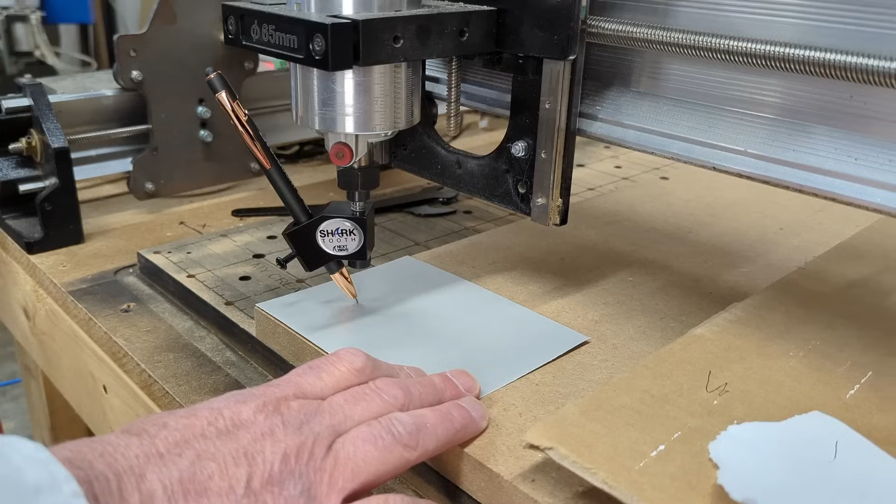In this video, I want to show you something really interesting on CNC routers. It's writing with a CNC router, like writing like that.

Now we have Liberty over here. Say hi, Liberty. Liberty's our shipping girl. She's the one that sends you your packages and writes really cool stuff on your packages and sends you M&Ms. But what she's doing right now is writing on a card.

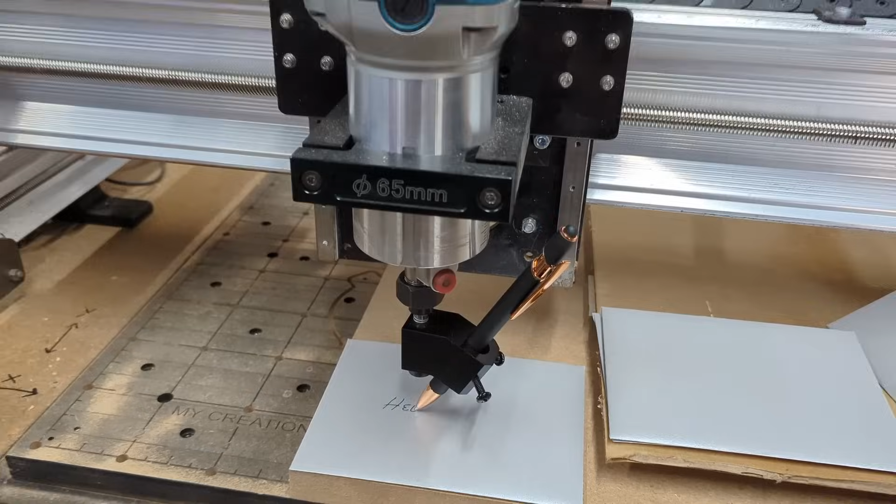So bring it in and see what we're doing here. We're writing on these cards from IDC Woodcraft, Hello CNC. If you notice here, we have a whole stack of them. IDC Woodcraft has product on Amazon, and we always want to put a personal touch on the packages. She's like, you got to write something on these cards, Garrett, that we send to Amazon when people purchase from Amazon.

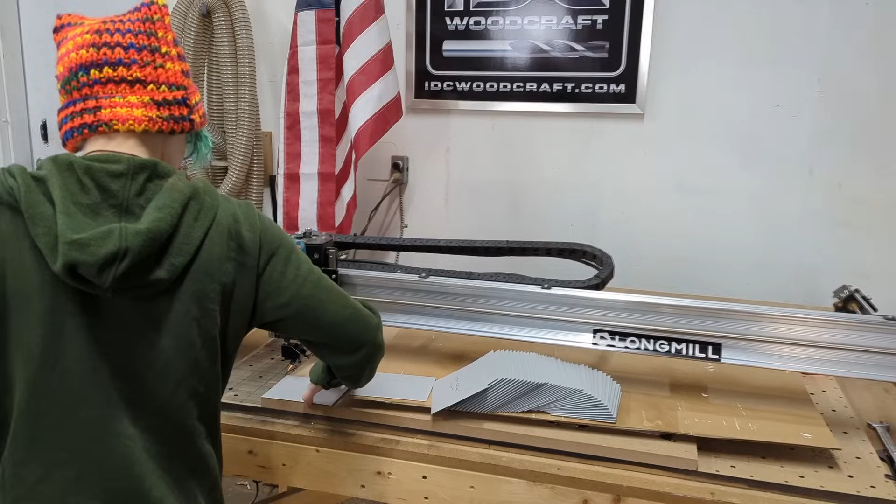So we ended up getting this pen writing jig from Shark CNC, Shark Next Wave, that writes on these cards. What she does is she just places the card on the machine after I've programmed it, and voila. And this is your handwriting, right? This is my handwriting.

So in this video, I'm going to show you how to create handwriting using the Vectric software, and then we'll get it over to the CNC router, this LongMill CNC router. I'll show you how to actually draw this stuff up in the Vectric software. So when Liberty is done, we'll go ahead and get into the software. I'll write up this little Hello CNC, show you how I do it, and then we'll bring it over to the machine.

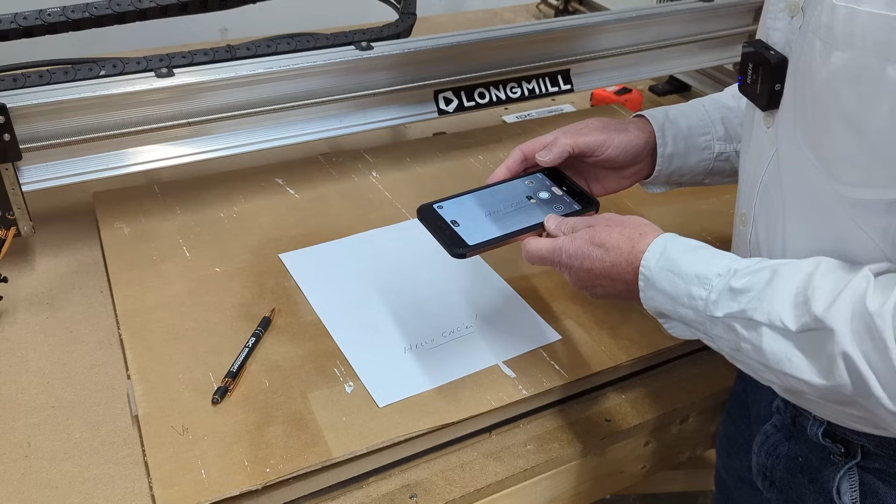And that's it. With that, the next thing I'll do is I'll grab my cell phone and I will simply take a picture of it. What I'll do is I'll get a pretty good distance from the project, maybe zoom in a little bit. I'm not really worried about shadow or background stuff that's like printed on the other side of the paper. I can work with that. So I'll simply just take a snapshot, and that's it.

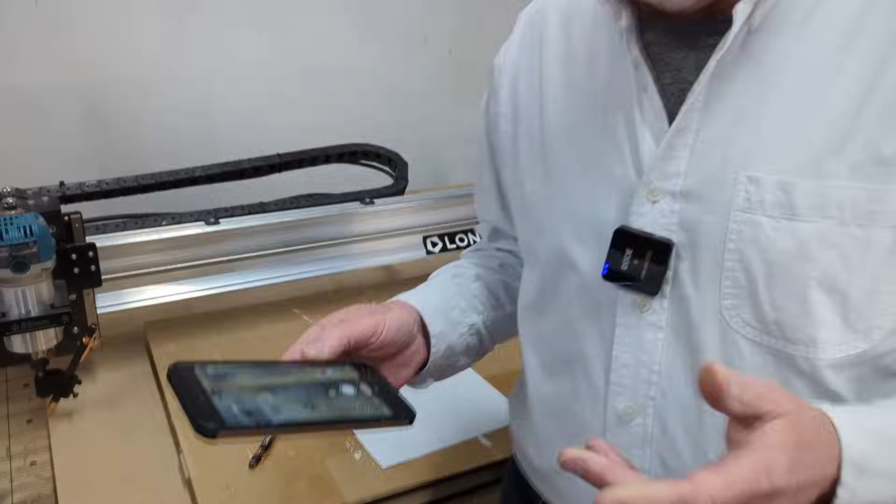So we are now on the Vectric software, and the tools that I'm going to use may not be in other design softwares, but there are similar things that you can play with in your design software.

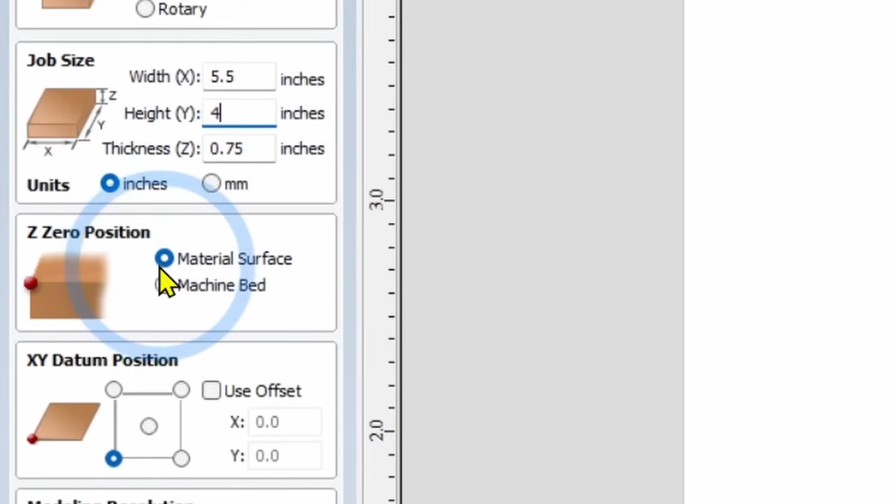So the first thing I want to do is create a file. We'll click that, and then we have to set up our job. This is a single-sided job, and we just need to set up the width and the height of the envelope, which is 5.5 inches wide by 4 inches tall, and I'm not worried about the depth. We are going to set this off the material surface and the lower left corner of the project.

Click OK. And now what we need to do is import this photo. Now, however you transfer photos to your computer is up to you. I simply just emailed the photo to me, and now I've downloaded it to my computer.

So what we're going to do is in the Vectric software, at the very top where it says File Operations, there is a folder with a little blue arrow coming out of that. That's where we import a picture or a bitmap. We're going to select that and go to the appropriate folder, which I have brought it into my downloads folder, and there's the image right there. So I'm going to double click it, and now it is in this project.

And you can see there's some numbers and stuff. That's actually a back of a bank statement. I don't really need that. I don't really care about that.

What I'm going to do is expand the size of this picture a little bit bigger. I want the Hello CNC to be bigger. So I double click the image, and these little beads came up all the way around, and I'm simply going to hover over one of the beads, the white beads on the corner, and I'm going to choose the lower left corner at this point and drag it out.

These beads are for expanding and contracting images, however you decide to do it. If I grab the one on the right and stretch it out, or grab the one on the left, it does the same thing. If you grab the bead on the bottom or the top, it stretches it up and down, and the corner will bring both X and Y to scale as you stretch it.

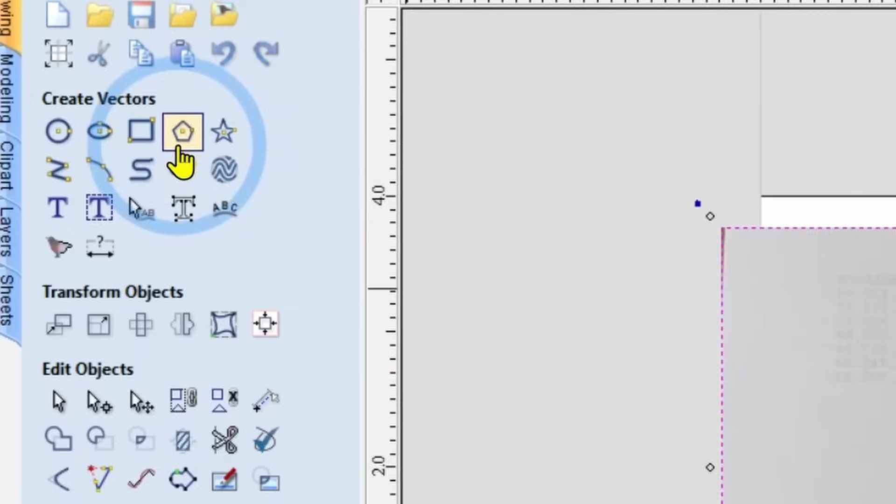We're going to create a rectangle around Hello CNC and crop away the rest of this image. Come over to the Create Vectors area and select the rectangle - don't worry about anything in the menu. Find the high point, the top of this exclamation point, hold the left mouse button down, stretch out over Hello CNC, let go, and now we've created a rectangle.

We're going to close the rectangle function, and while the rectangle is selected, hold the Shift button down and select the image. Now you can see the Hello CNC rectangle and the image are both selected.

We're going to go to the Edit Objects area, third row down, all the way to the right. When you hover over it, it says Crop Bitmap, with a little circle on a rectangle icon. That's going to chop away everything outside that rectangle.

As you watch the screen, I'll click the button, and the computer's going to think for a minute, and there it is - it got rid of all that. So now I don't have any more noise on this.

You can't see my bank statement and how poor I really am, but that's okay.

So what I'm going to do now is just eliminate the rectangle I just drew. We'll zoom in a little bit, select that rectangle - you can see it selected now - hit the delete button and the rectangle is gone.

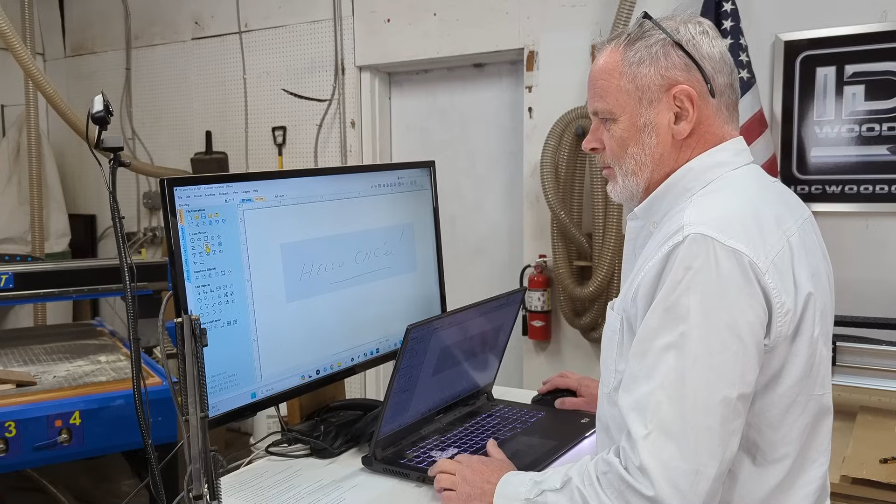We're going to come up to Create Vectors, the second row down. The thing with the second row is this creates all open vectors - they create lines that are not closed. What I mean by that is a closed vector would be a circle.

There's no end to a circle or a rectangle. You can keep going around it - it's closed. Whereas an open vector would be a line. There's a start point and a finish point.

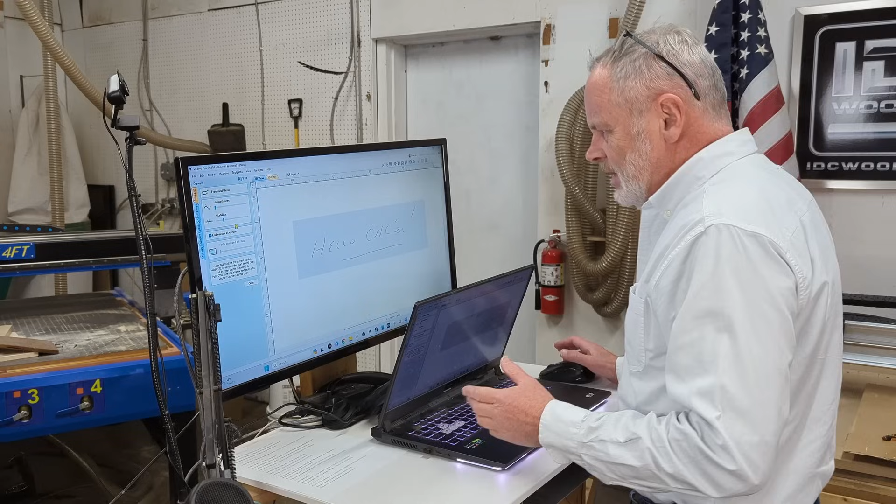So what we're going to do is come to the open vectors drawing area, which has draw a line, straight line, draw an arc, draw curves, and this fourth one is the one we want, where it says freehand drawing. Select that, and you've got some sliders here, and the sliders are going to determine how tight the freehand drawing is, as in how it's going to place nodes.

Now I'm not going to dive deep into that because I'm still learning this part, but the handwriting part is really cool. While this is selected, we're simply going to come over to the H in hello. Now you see my cursor is a little plus, and what I'm going to do is start right at the top of the H. We'll even come in closer, and I'm going to hold my left mouse button down and simply drag down along that line.

And I'll even put that little hook in there - I stopped for a moment and then hooked around. So you can see I have now drawn a line over that H. It's not quite as straight as what I wrote in my handwriting, but that can be fixed up.

Of course, this is handwriting. Handwriting isn't clean and straight, so I'm not going to worry about straightening things up, but I'll show you how to straighten things up and rearrange them as you need.

We're going to come over to the cross part of the H, and it looks like I started on this side, so I'm going to start on that side. I'm simply going to hold my left mouse button down and draw a cross, and then we'll finish the part of the H. We're just going along that way, and there we go - we have just drawn the H exactly the way I write an H. And we're going to do this for all the rest of these.

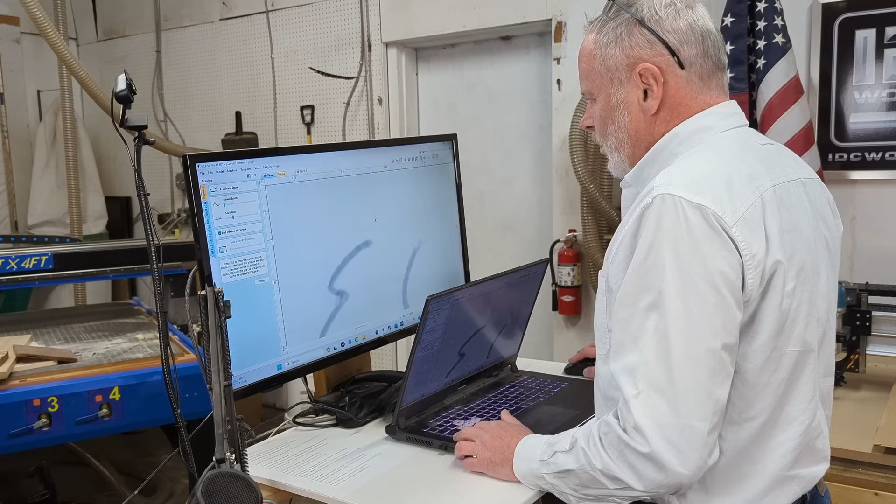Now, if you notice, you can't really see it here - I'm going to see if I can move this around. As I hold my left mouse button down over the top of the E, a little circle pops up around the plus. What is happening with that circle is, as you're drawing, the line is attached to the plus on your cursor. Wherever you're going, that line is basically drawing a straight line to the boundary of that circle. So once the line leaves that circle, then it's free to go wherever you're drawing.

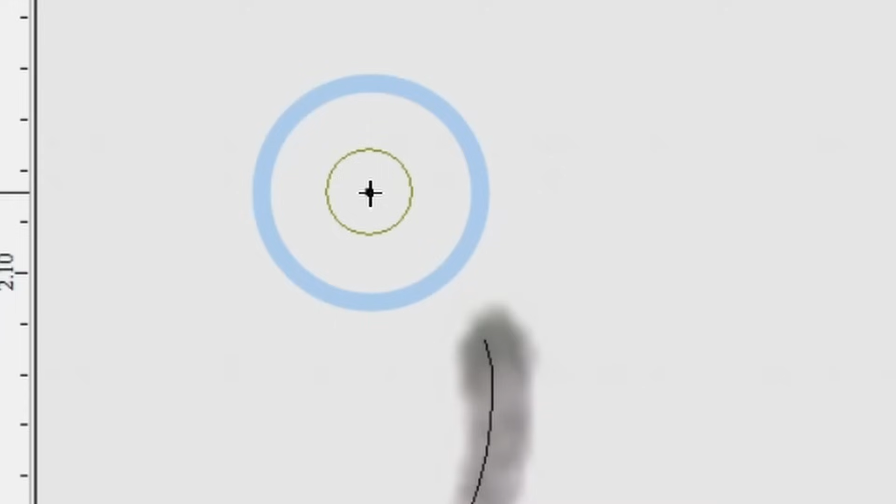What I'm going to do now is change that a little bit. We're going to go to the stabilize slider, and I'm going to slide it all the way to the right, and now I'll click my left mouse button again, and now you can see that yellow circle is a lot bigger. Now notice as I'm moving, the yellow circle is not changing until I actually touch the circle.

And the line is actually drawing from the center of the circle. So the cursor comes to the edge of the circle, and then it starts to move with that line, drawing from the center of the circle. So if you want to draw really fine detail, just make a smaller circle by reducing the stabilizer bar down to here, which is where I was working at before.

So I'm going to hit Control Z to get rid of what I just wrote, and we are going to continue on. Now I'm going to hold over the E and just drag. Now you see I goofed up already - I can always hit Control Z to undo and restart, and I'll just come down and swing around like that, and we just come around like that. It's very close to what I draw.

Now what happens if we want to continue on from one of the start points or the end points of that line? Well, it's really easy - you just hit the control button while you're hovering over the end point of the line.

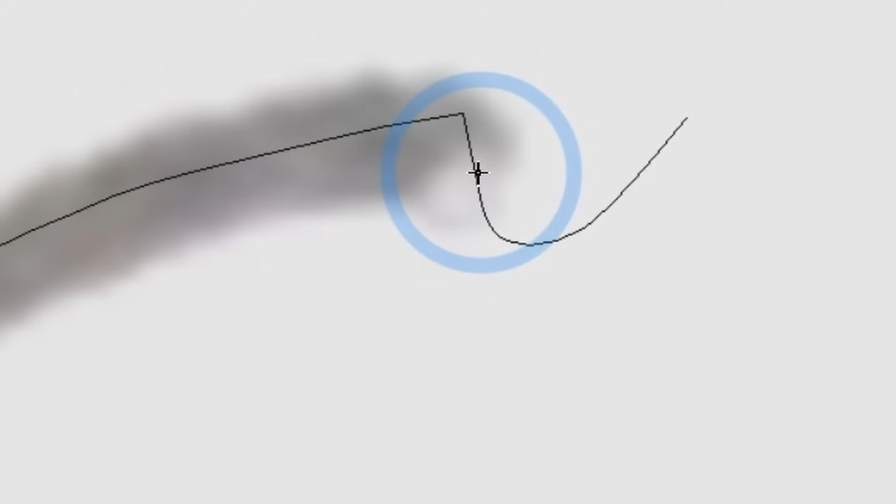You see there's a little target that pops up. When that target appears and I start to draw a new line, it's going to attach itself to the original line I already drew for the top of the E. I'll hit escape to end that function, select the second line I drew, and you can see it's all one vector. I'm going to hit Control Z because I don't need that section.

We're going to restart the freehand and come back in and just write what looks like a half moon, which is my L, and I just did a really bad job drawing that L. So we're going to adjust it using a different way. I'm going to show you how to do it using nodes.

Nodes are transition points in lines. With a node, you can actually edit it, move it around, and do all kinds of things. I have a video about nodes, which I'll link in the description, because nodes are one of the most important things you need to know when working with your design software, particularly Vectric.

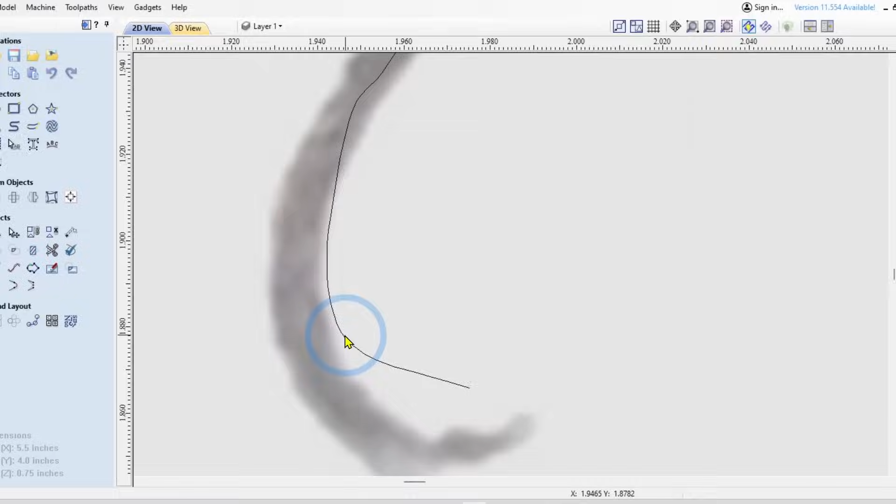So while I'm here, I'm going to exit this freehand drawing by hitting the close button. I'll come over and select the line so it's highlighted, and on the keyboard I press the letter N, and now our nodes pop up. All you have to do is hover over a node. As you see with my cursor, we know we're in node mode when we have the arrow without the tail on it.

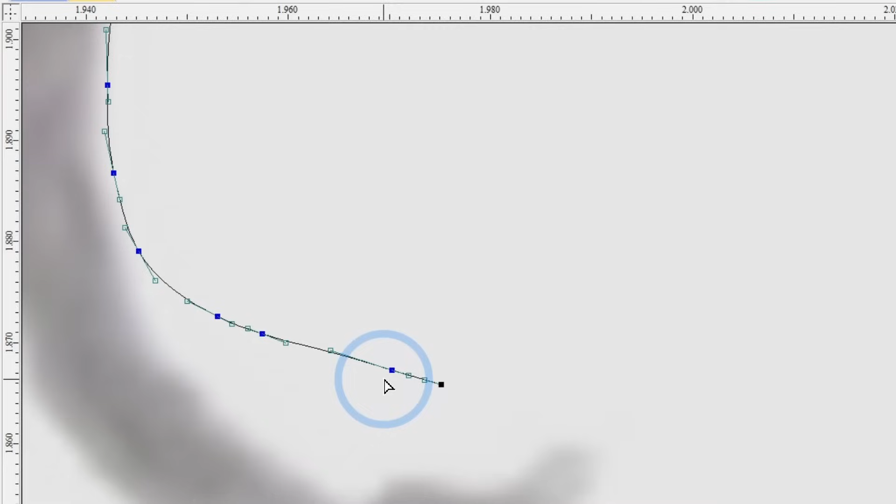I'm going to hit the escape button. Watch the cursor — when I do that, it changed color and added the tail. When I hit N, it lost the tail, and now I just need to select the line.

There are the nodes. When you hover over a node, the cursor changes to a little target. That means I can grab that node, and I'm going to drag it over to the line. I'll grab the next node, drag that over, and grab that last node and drag it over too.

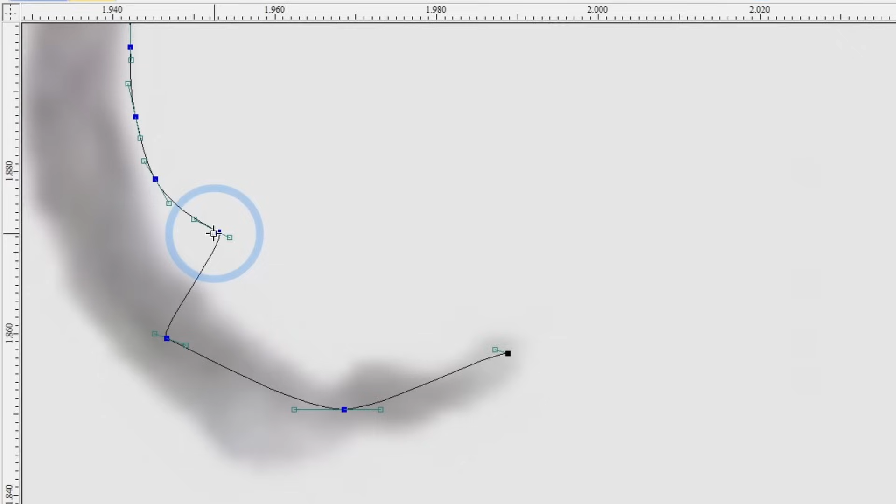Now that looks a little funny there, so you see these little flags for the nodes. We can grab the end of the flag and change that as well. So there we have made some adjustments to my imperfect handwriting on the computer.

Freehand drawing takes a little bit of practice and technique, but it's an interesting way of doing things, like writing a letter over and over and over again, like hello CNCer.

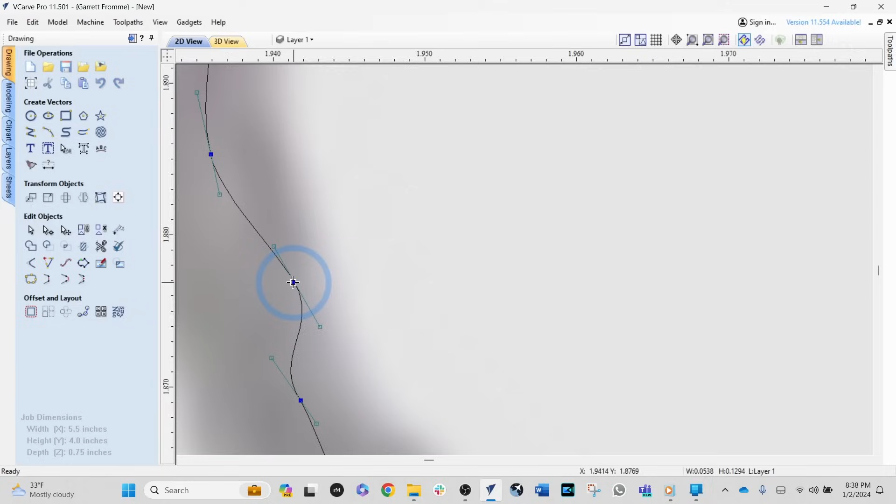So I'm going to get back into this. I'm going to fix the rest of this up. Oh, one other thing — I have two nodes right there close together. I don't need two nodes close together, so I'm going to hover over this node and on the keyboard hit the letter D, and that node went away.

And then I'm going to hover over this node and just put it over there, and now I have followed my L much better. We'll hit escape to get out of node mode.

Nodes are very important, so you definitely want to go watch that video that I just told you about. Again, I will link that in the description. A lot of times when you're doing design work, especially if you're brand new with the Vectric software, things don't seem to work out the way you want them to, and it's usually because a closed vector is not actually closed, or nodes are crossing over each other — many different things.

So I'm going to go back to freehand, and I am simply going to finish this out.

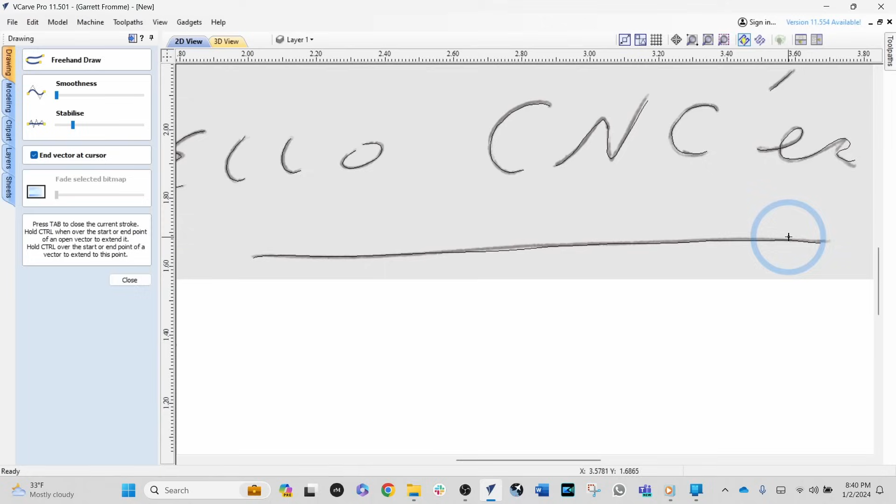At this point, I have drawn it up. It actually took me about 3 minutes to do this. A couple of boo-boos in here, but this is the fun part about this — you can correct boo-boos in your own handwriting, like this letter R. You can see I added a little bit more of a rollback on it just to clean it up a little bit and make it look more like an R.

When you're doing things like the apostrophe or a period, you always want to get a little bit of a line in there, not a dot, a line, because you want that CNC router to come down and just move a little bit to make the mark.

So that's what you need to do. You'll also see that my exclamation point is way high over that period. So here's how we're going to fix this.

First of all, I'm done with the freehand, so we're going to close that. And I'm going to turn off this bitmap so we can see exactly what I wrote.

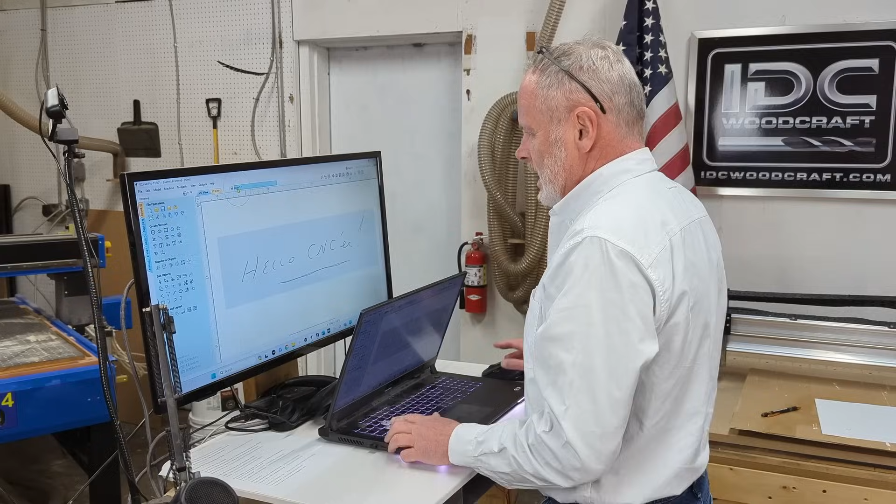So we're going to come up to this area, layers. Now, the thing with layers is another very valuable tool that you will find extremely useful when you're doing your design work, especially when it's a little complicated, where you have multiple layers. I've created a video about layers. It deep dives into it so you understand it. I suggest that you go watch that. Layers and nodes, you will find those invaluable tools in your design work.

So I've come up to layers, and whenever you import a bitmap, it'll always create a layer called bitmap layer. But that's where the image is. Now you see the little light bulb next to it. I'm going to turn that light bulb off by clicking it. Right now it's yellow, it's indicating that it's on. And if you watch the screen, you can just turn that off and the image went away.

Now the drawing is on layer 1. I'm going to hit the light bulb next to layer 1 and everything's going to go away. So that's the thing with layers.

We're active on the layers, layer 1, because it says it's red there, and also at the top it says layer 1. So I want to turn that back on. Once I turn that back on, layer 1 will turn black, and you'll know you're on layer 1 again because it's bold there as well.

So we're going to simply come over and click in the drawing area, and I'm going to select this top of the exclamation point line, and I just want to move it down. So I'm simply going to use the arrow keys on the keyboard to nudge it down and get it a little bit closer to where I want it to be.

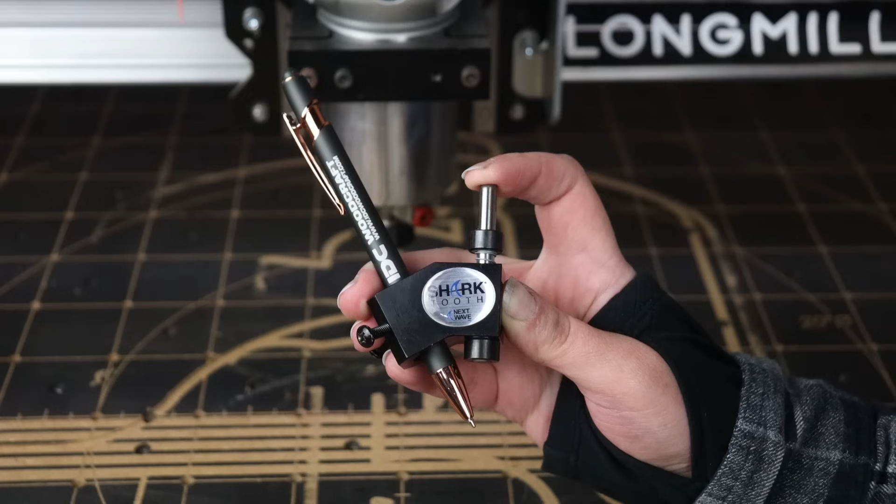One thing with the tool path and pens, the tool I'm using here, which I'll explain to you in a minute, and I will link that down below, you can't go deep. You can use a standard profile toolpath, but your depth of cut technically needs to be very shallow. Now this tool gives you a quarter of an inch motion, but there's a spring load and it can actually push down kind of hard on the paper that you're drawing on. It's something you have to get used to.

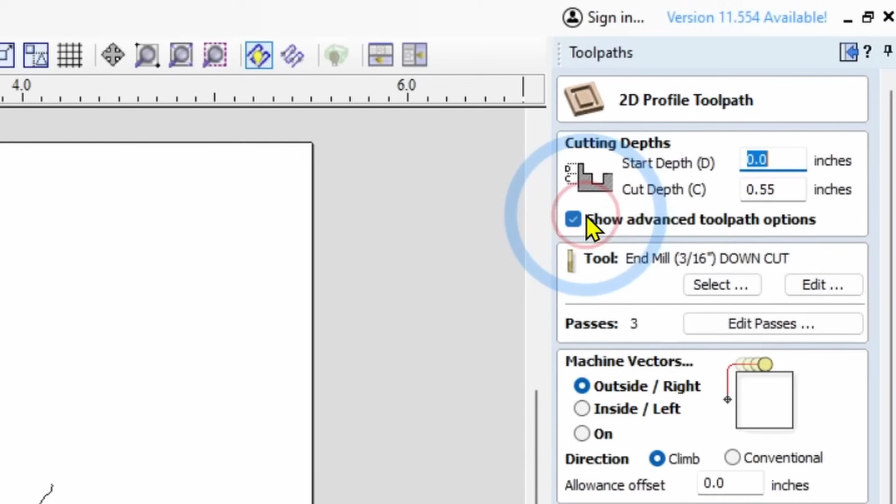So we're going to program this up real quick. Very easy to do. Come up to this little blue arrow in the upper left and click it, and that's going to switch us over to toolpath. And we're simply going to come over to profile, the very first toolpath, select that, and it doesn't necessarily matter what CNC router bit we select here, because we are actually going very, very shallow.

Now you can use an engraving toolpath. I'm just going to use a profile toolpath on this because that's all I want to use. It's just easy for me to do it that way. The key here is to make sure the depth of cut is set properly.

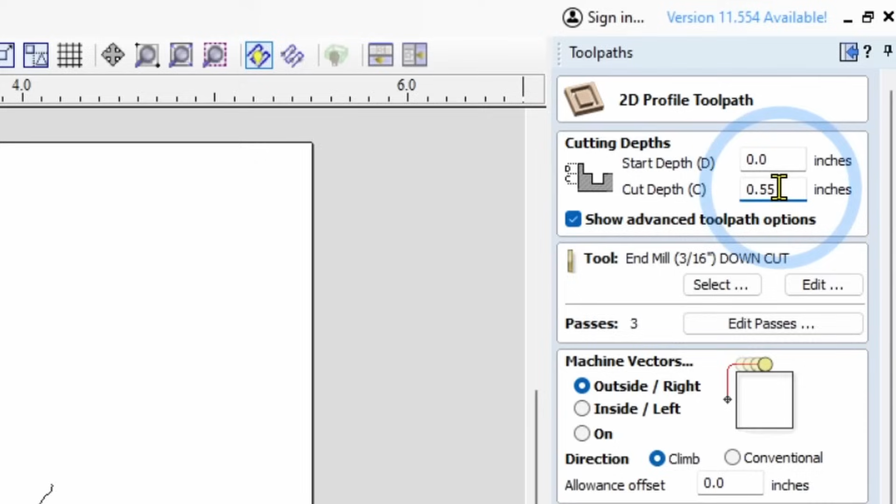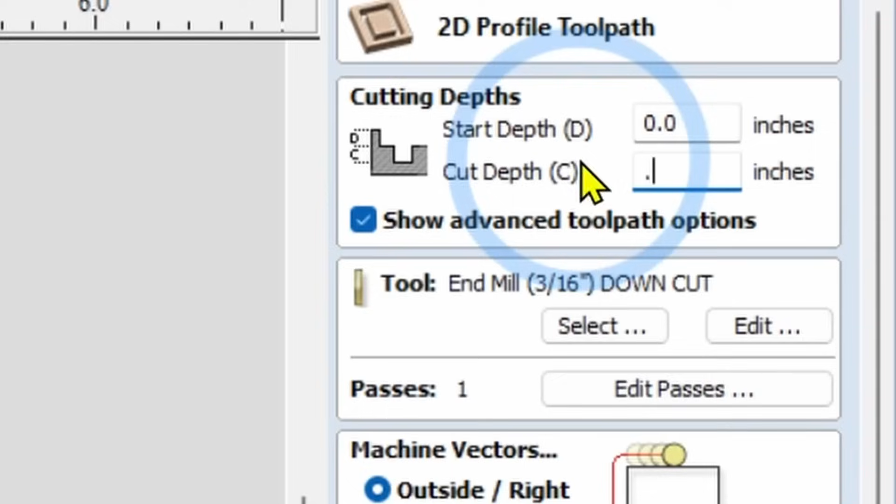So what I'm going to do is change that depth of cut, and I have learned that the depth on the pen, once the pen touches the paper and starts to apply pressure, is about 0.01 to 0.03. So I'm going to change this to 0.02, and then I'm not going to worry even about the tool here, it's an end mill.

The thing that's important is, on your machining vectors, you want to be on the line. We want that pen to draw right on the lines that we drew right over here in the Hello CNC. So select on, climb, conventional doesn't matter. We are actually ready to go, other than I've got to select these vectors.

Now, one of the things when this machine is writing, and we're doing it over and over again to write these thank you cards, I want it to be efficient. So we're going to select the vectors in the specific order that I want the program to write the G-code in. Here's how we do that.

We simply select the first line in H, and I'm going to hold the shift button down from now on, and select the lines in the order in which I wrote them. We're still holding shift as we select everything, including the dot, that line, and the underline, and we're set. We're simply going to name this toolpath down at the bottom: Hello CNC, and calculate.

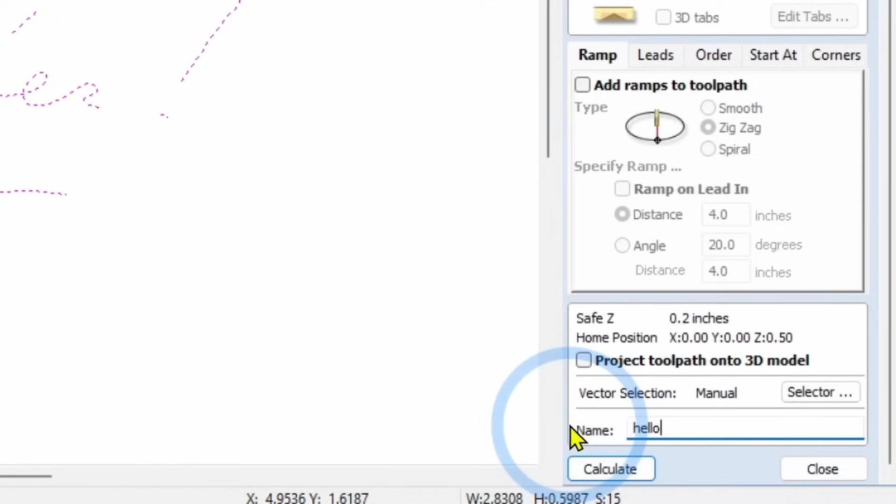And that's it. So what we're going to do now is simply generate the toolpath for this, and then we'll set up the machine.

Close that. In the Vectric software, it's the very lower right icon. When you hover over it, it says Save Toolpaths. We want to make sure the Hello CNC toolpath is checked in the little checkbox. Select that, and as long as you have your right post-processor selected, come down and click Save Toolpaths. I'm going to save it to my Downloads folder. The name of the file is Hello CNC. Click Save. That's it.

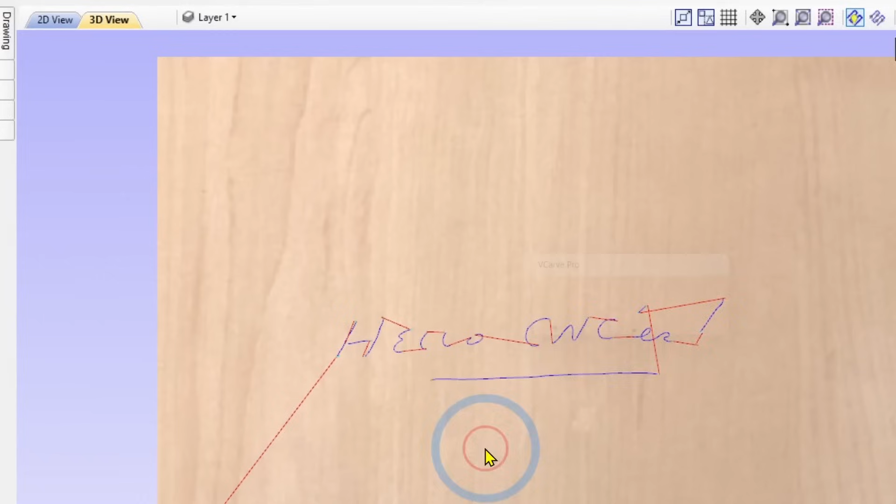We are ready to go. We're going to come over to the G-Sender software. Now, G-Sender is the control software for any Arduino-based CNC routers.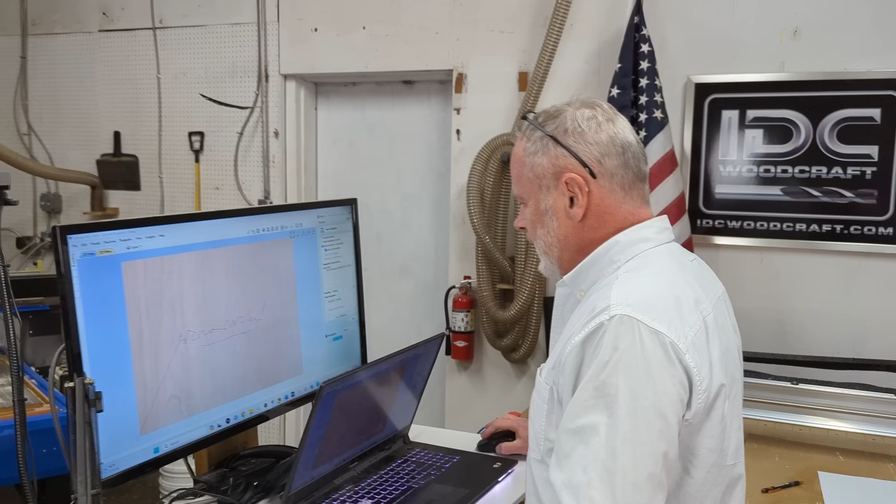So G-Sender is the most current control software available for CNC routers, like the Long Mill CNC router, this MK2 here. The reason I always recommend that over UGS or some of the other ones out there is because it is currently and always being updated, whereas the others have written the control software and that's it—they leave it alone instead of always improving on it. So I always recommend G-Sender; besides, it's a very user-friendly program.

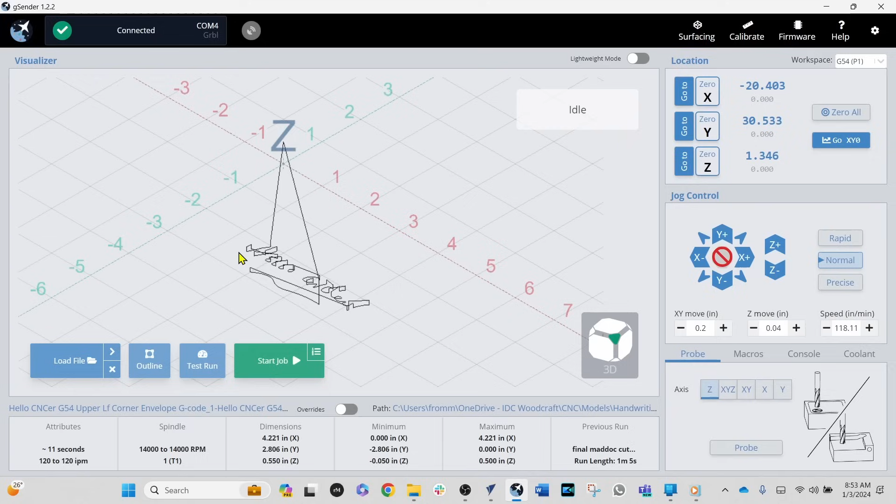So we're going to simply come into Load File, go to the directory that it's in. There it is, Hello CNCer. Click it, open, and it has now loaded into the G-Sender software. You can see everything right here.

And now all we have to do is set up the CNC router, and we can start writing anything you want—draw pictures. The cool thing with this is you can have your grandkid draw a picture, and then you can work with him and design this stuff up, or do it yourself and draw it up and carve out on a project exactly what he drew.

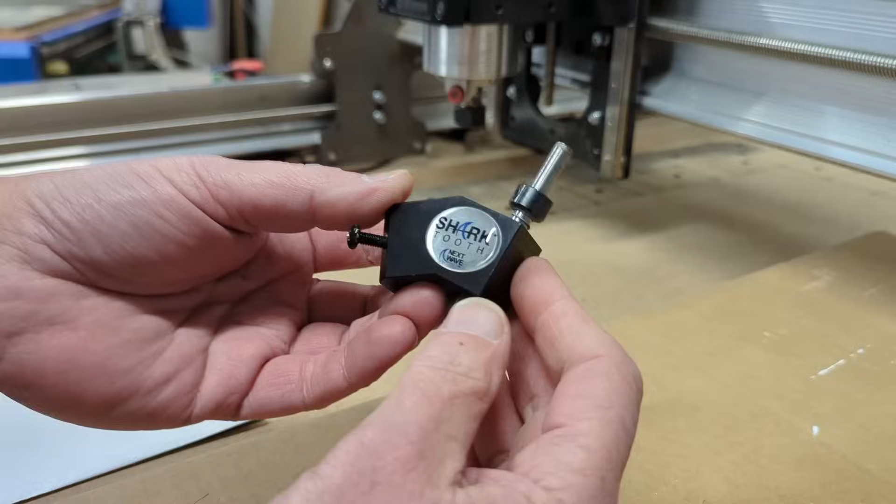That's kind of cool. All right, we're going to get into setting this little tool up. So this is the tool that we're using. It comes from Shark Next Wave—they call it the Shark Tooth—and it's got a hole for your pen or marker that comes in at an angle just like this.

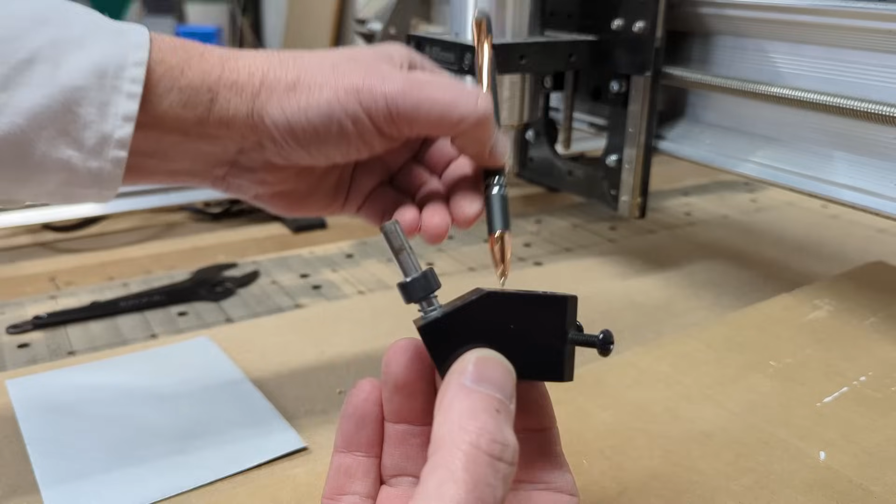So what we need to do is, first of all, put the pen in, but we don't know exactly where to bring the pen down to have it centered on the shaft. So we're going to put it in the router first.

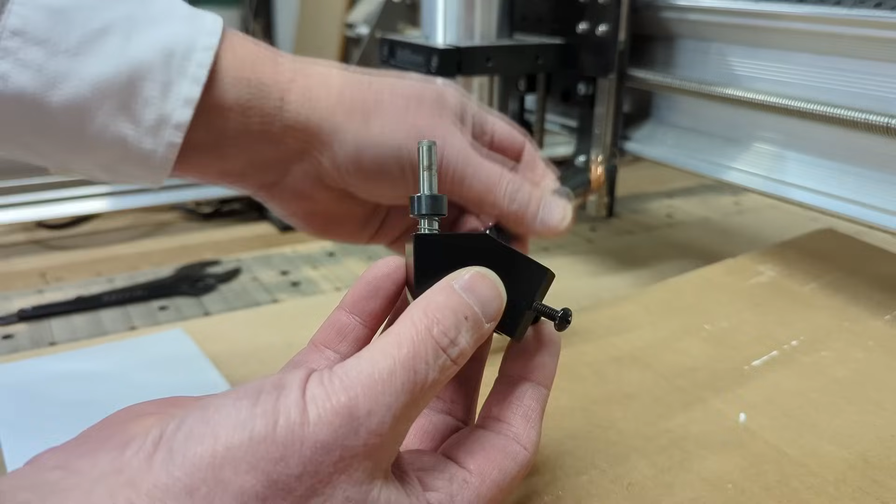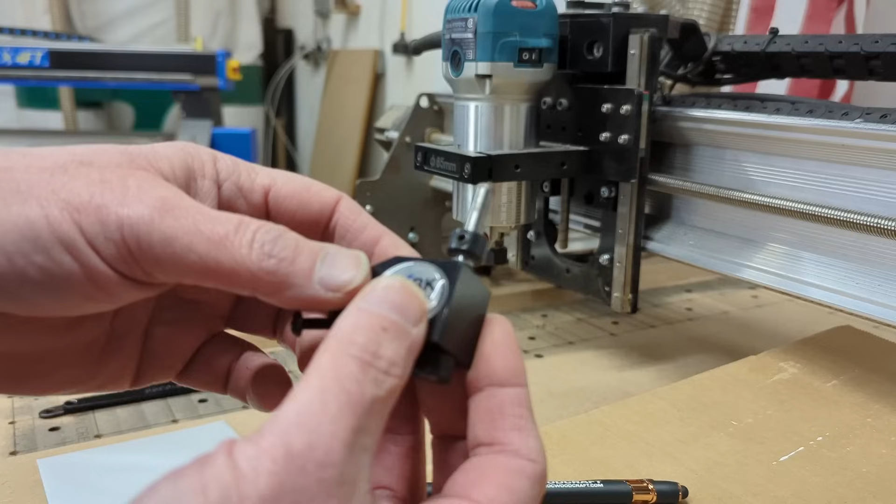Now I just want you to notice that this is spring loaded, so when a pen touches down it'll push up a little bit. But the one thing I don't like about this is the pretty heavy spring pressure. I suppose I could loosen that collar and back it off a little, which would lighten up the spring pressure, but that's something you can do. So we're going to put this up in the router, and this never spins—you never turn the router on when you're using this thing.

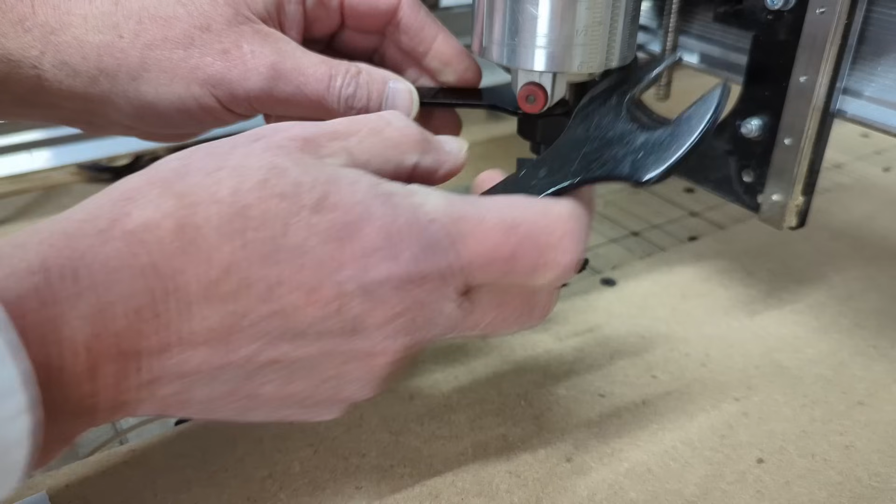So I'm not going to put it in real tight, just enough to hold that. That's all I need. Then we're going to move the machine over to the surface. Now I've got to write on this card here.

So then what we want to do is put the pen in. I changed these screws because I wanted longer screws in there, but they come with set screws. We're going to drop the pen in, and if you can see, it's just like that.

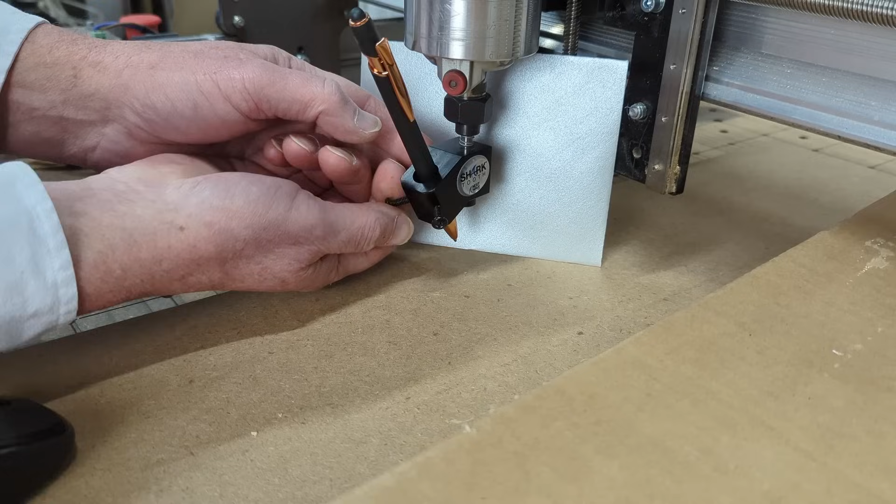I'm eyeballing the pen to the center axis here. I'm going to bring it down, and then I'm simply hand tightening the screws to hold the pen in place. It's very quick to tell. You can swing the pen around, and now with the pen in there, I can swing it around.

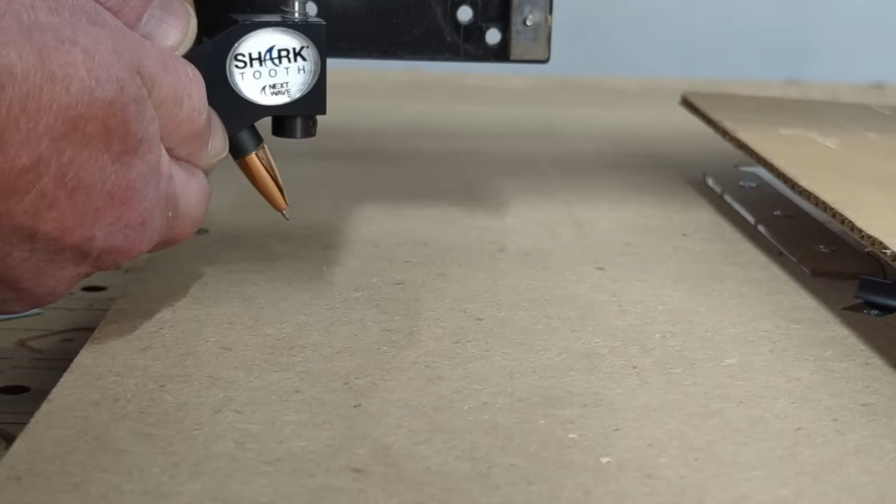I can see that the pen is still spinning around a small circle just by looking at the point. So all I'm going to do is loosen the screw up, bring it down a little bit more, hand tighten the screw, and we're pretty close to it. So now I've got the pen positioned the way I want it.

I'm going to snug it up with a screwdriver. Of course, don't do it too hard, you'll crush your pen. One of the things we want to be very careful about when doing this is the pen will come across, and you can hit something and break it. So you always want to be aware, just like with CNC router bits, of things that may be in the way when you actually start to write.

So I'm going to tighten it down, and then we are going to set the Z, X, and Y to position it, and then we'll write on the card.

So I have set my X and Y position to the lower left corner of the board, which is the lower left corner of the project. I can simply position that project right here. The important thing is setting your Z properly.

So what I like to do to set the Z is take the paper I'm writing on, this envelope, and place another piece of paper right on top of it, and we'll just simply start to nudge it down. I'm going at the lowest speed possible, and I'm moving the paper around until it actually starts to write on the paper.

So it's taking a minute, but there we go. I can feel it starting to grab, and there it is. You can see I got a little line on the paper here. So what I'm going to do is bump it up just a tad on my Z so that the paper is now free and it's not writing on the envelope. I'm very good with that.